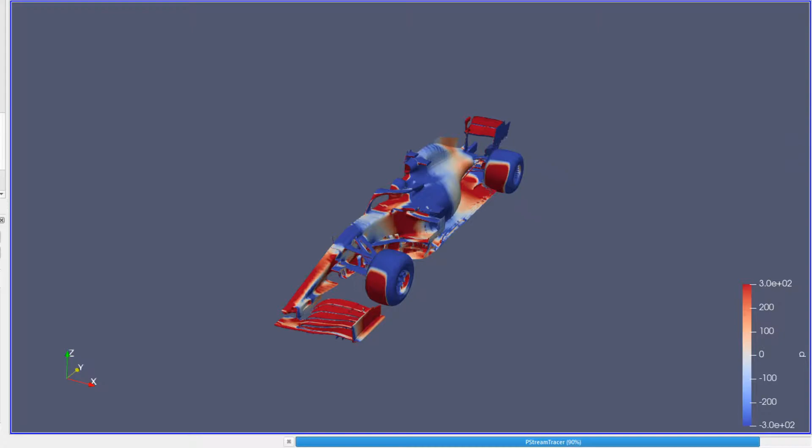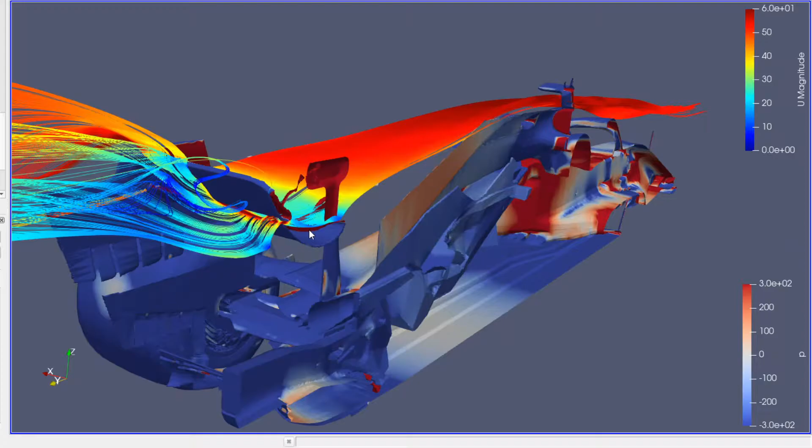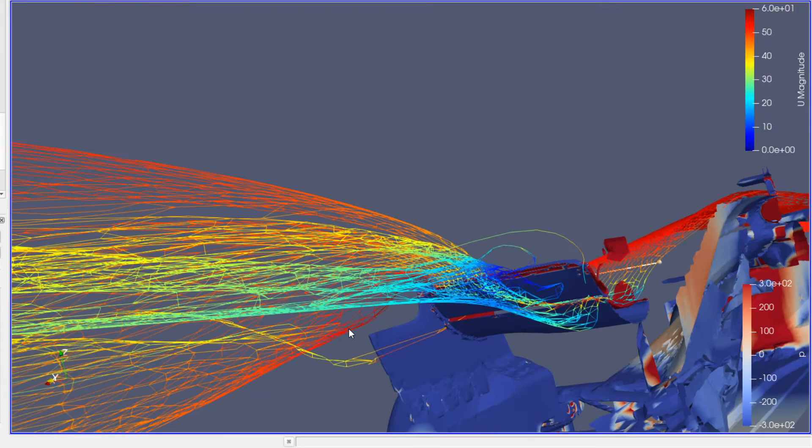So let's start here with the rear wing. There you can see most of the air for the rear wing coming from the top through the back. This line is the same, I'll keep it the same on every car, every analysis, so we can compare what it is. You can see it's working well. They've got a bit of a bowl in the middle, also a 3-vane, so that's why that air is coming through there. Okay, not much more to say about that.

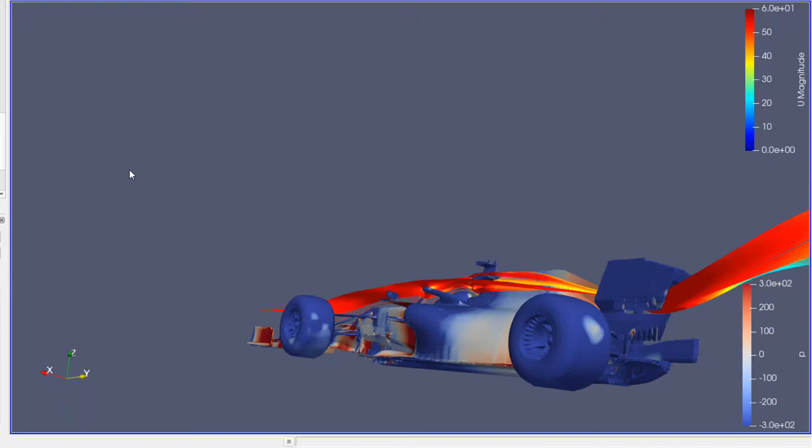The T-wing area, you can see it's a bit different with the McLaren. They're not running a T-wing, so the air behaves differently. We'll look at the Mercedes one just now. They're just going underneath the wing, creating downforce.

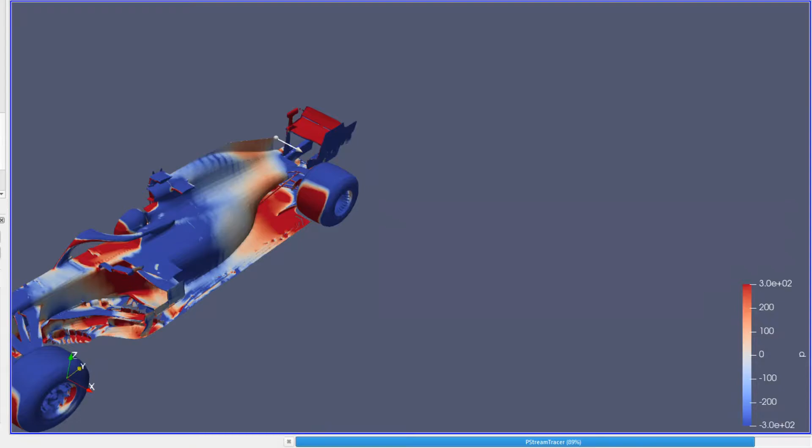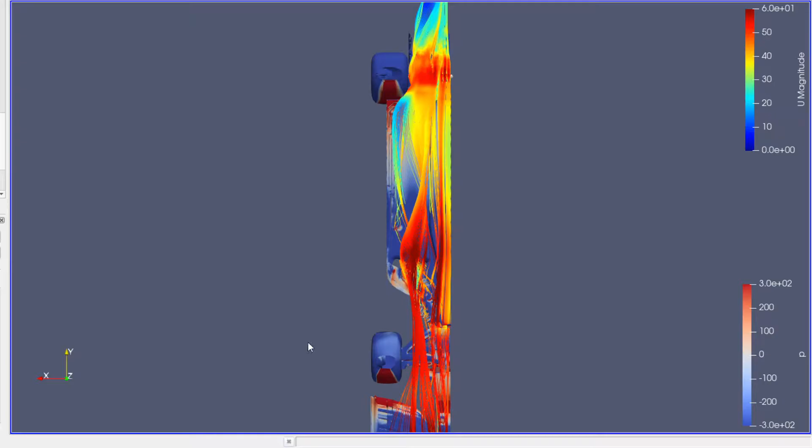In the diffuser area, you can see where the air is coming from down the side to the back there. The sealing gaps here, air gaps, let air in to try and seal it there. The air that they're getting from the diffuser is all coming from the front of the car here, a little bit from the wheel. Most of this is coming underneath the wing through the back.

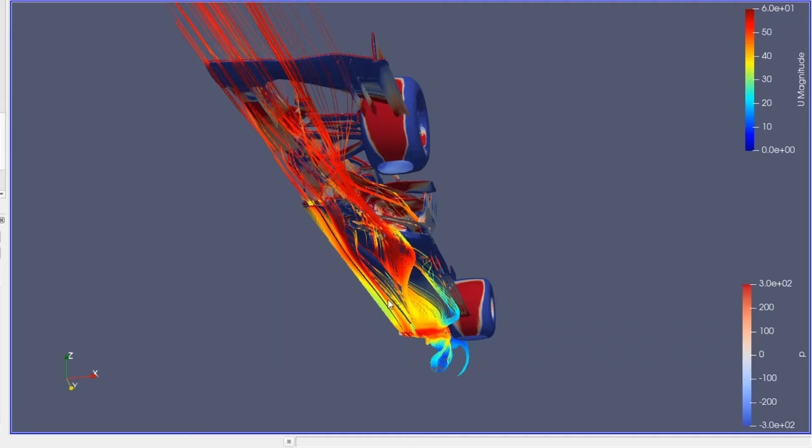Now we're going to look at the slice. You can tell it by the speed. You can see they've got this turbulent air behind the tires here. Other than that, all the flow is good. It's just here behind the tires, and the management of this low pressure is not very good. You'll see how the Mercedes is very different to this.

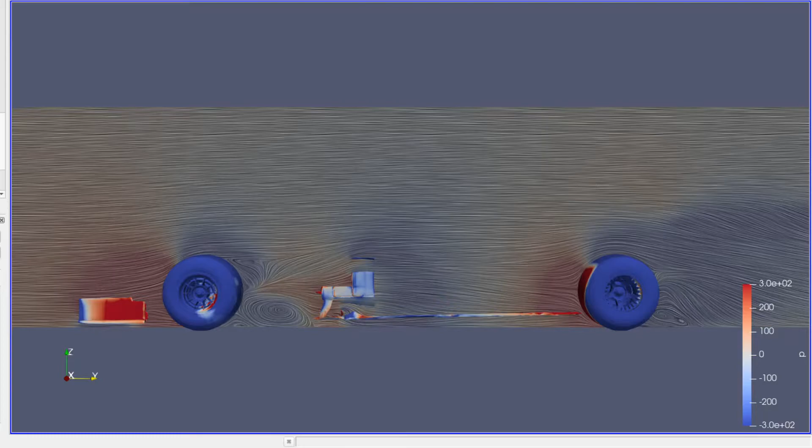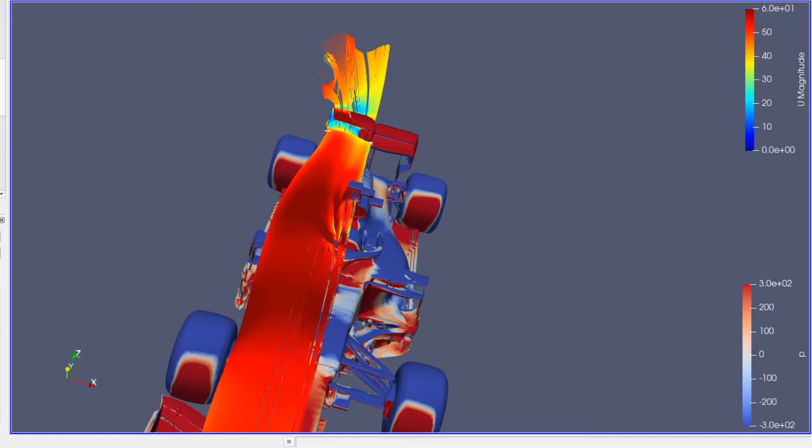So let's add in the Mercedes now. Rear wing there.

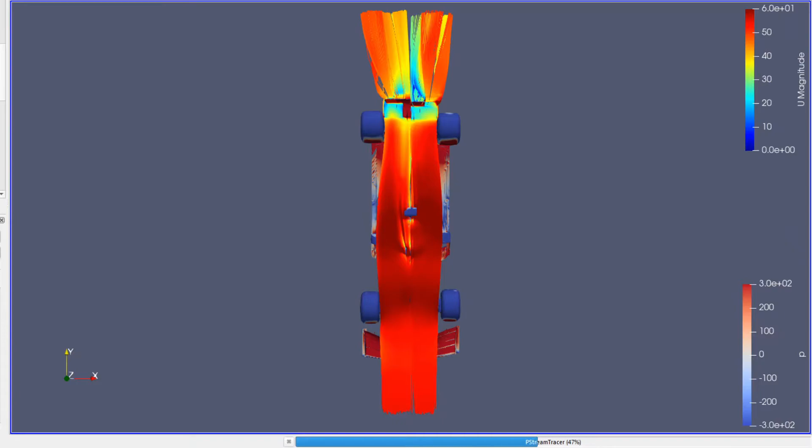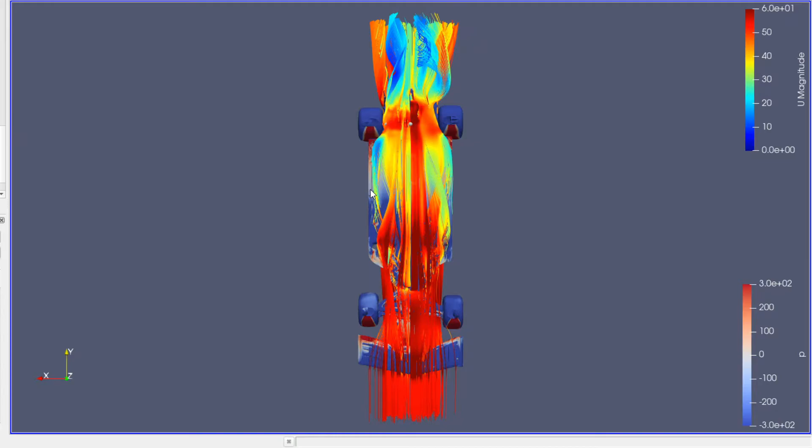So there you can see the two differences there. This is the Mercedes here, and the Mercedes and the McLaren. You can see a lot more air going underneath, a lot faster. The higher the speed, the lower the pressure, static pressure, which then creates more downforce.

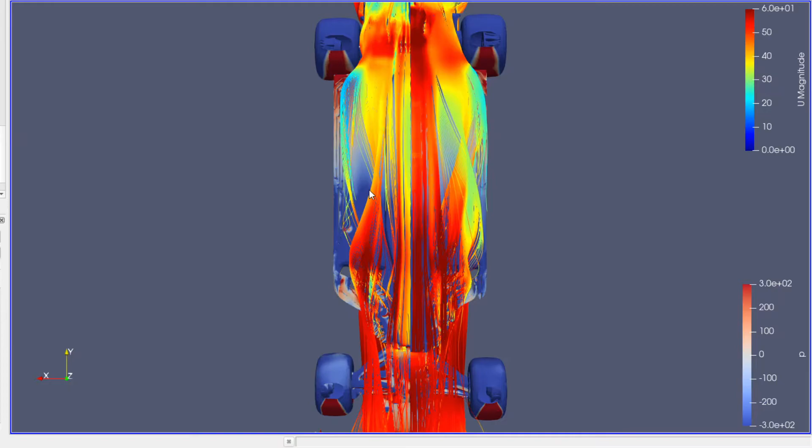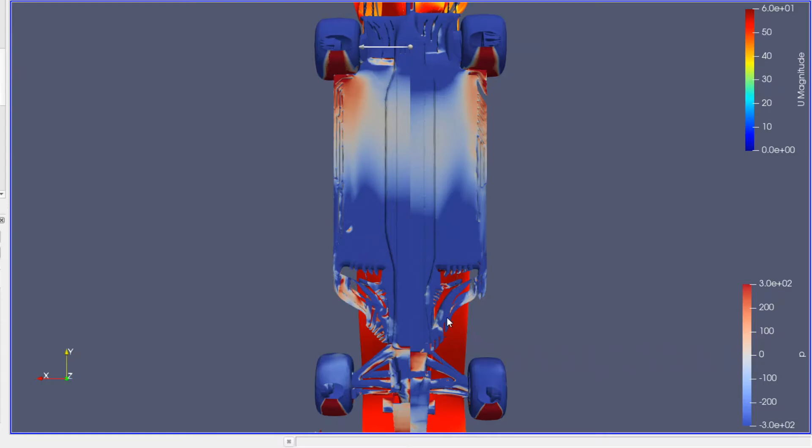So let's just take this one off, this one off. There you can see the floor area. The diffuser is working a lot better on the McLaren, but the floor seems to be working a bit better in the front here, while the Mercedes has more. The diffuser is working a lot better, but there's this gap difference in this area of the Mercedes that's not working that well. You can see a lot more low pressure along the whole car. There's high pressure on the McLaren, low pressure on the Mercedes, meaning more downforce on the Mercedes than the McLaren.

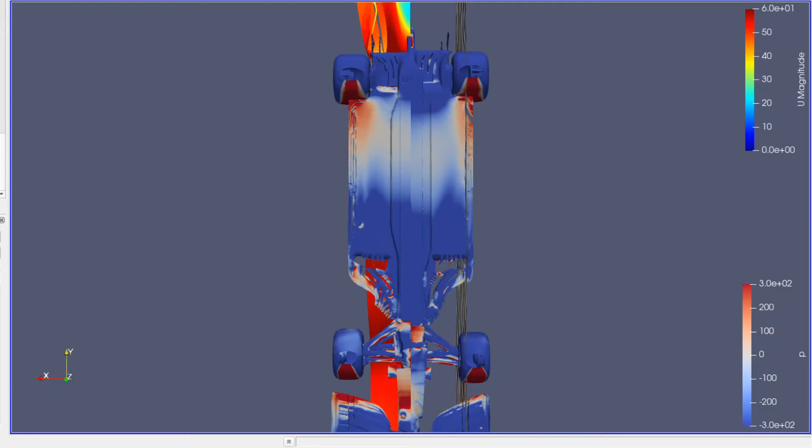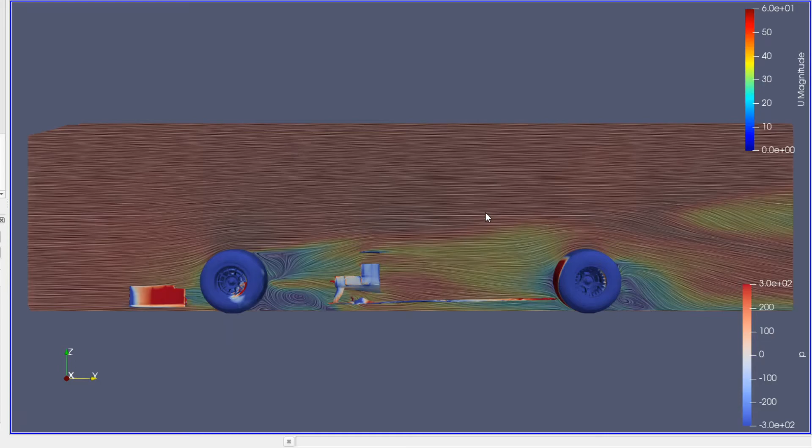Let's just have a look at that slice now. So here's the McLaren again. You can see the flow there. Let's go to velocity now.

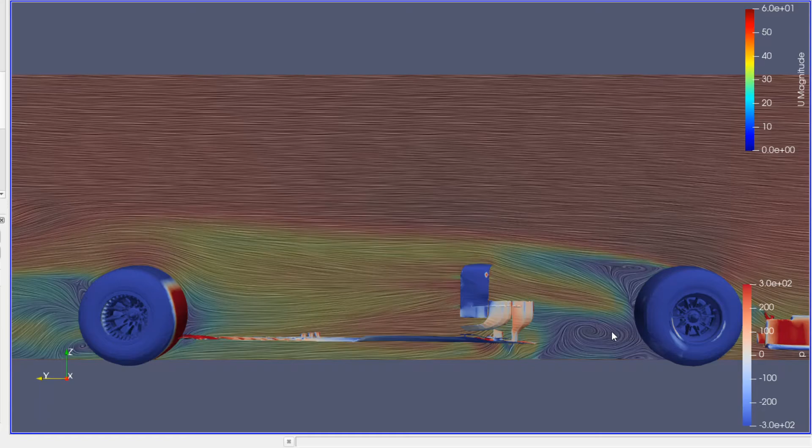And then the Mercedes here, the difference in the tire wakes. This airflow, they're getting air right from the back of the tire here coming through. This still has turbulent air behind the tires, but it's a lot smaller and a lot lower. So you can see this air here, it's going through there. A lot more is coming out from the Mercedes here than the McLaren.

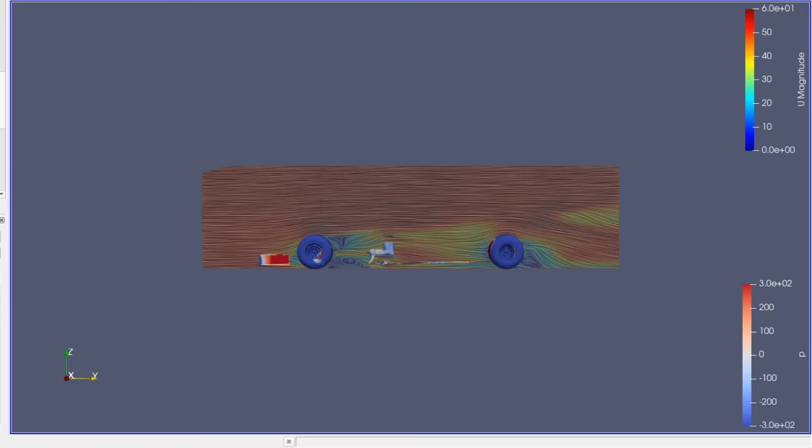Okay, and then lastly, we'll go through the results for the McLaren's drag, which is 992 newtons, and lift of minus 1237 newtons. The Mercedes W10 had a drag of 1093 newtons and a lift of 1749 newtons. So the Mercedes had 500 newtons more lift than the McLaren.